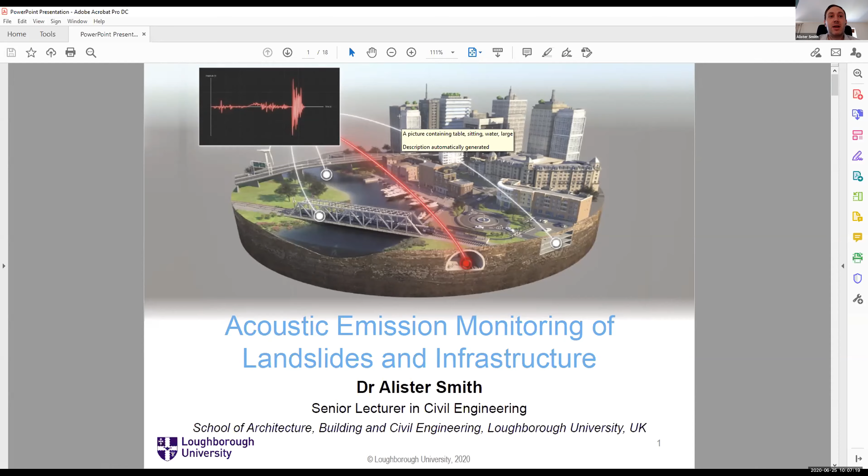My name is Alister. I'm an academic at Loughborough University in the School of Architecture, Building and Civil Engineering, and my background is in civil engineering. In this talk, I'm going to go through some research we've been doing over a number of years to develop an early warning system for landslides that's based on acoustic emission monitoring, how we've commercialized this system, and the ongoing research that we're doing since the commercialization took place. So first, I'm going to talk about landslides and why they're a problem. I'll then take you through the early warning system that we developed and how we commercialized it.

So this is a brief overview of my journey with this research. I started with my PhD in 2012 on a project called Slope Alarms, and the aim was to develop an early warning system for landslides that uses acoustic emission, and I'll explain what acoustic emission is in a moment. And then my postdoc research from 2015 to 2017 focused on redesigning the landslide early warning system for low-cost manufacture.

And the aim was to develop a system that could be used by vulnerable communities in low and middle-income countries, because these are the places where lots of people are killed from landslides. And early warning systems would be able to reduce these fatalities, but they're currently too expensive. And then it was in 2017 when we commercialized the landslide early warning systems. And since then, alongside the commercialization, I've been working on developing new acoustic emission technologies for new applications, such as for buried pipelines, for pile foundations, for dams and retaining structures.

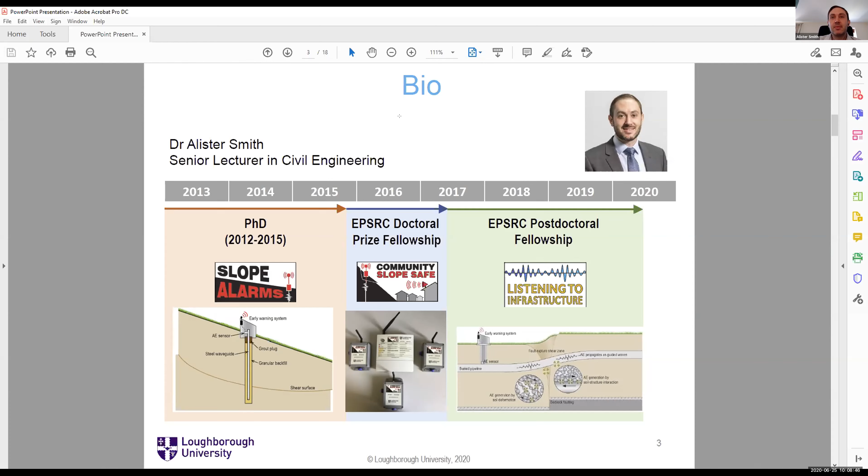So landslides kill thousands of people each year. Each black dot on this map shows the location of a landslide that resulted in fatalities between 2004 and 2010. And there were 32,000 fatalities from landslides in this period. And this is focusing specifically on landslides that didn't result from earthquakes, because they result in lots of fatalities, but the mechanisms of the landslide are very different.

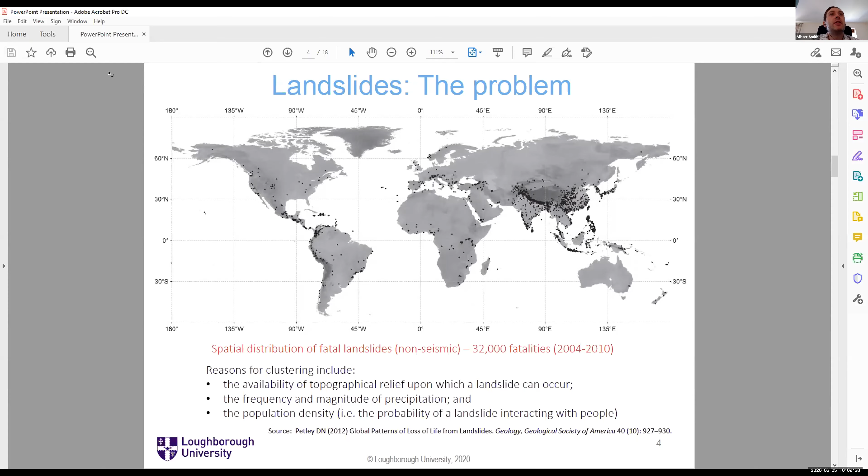So acoustic emission is essentially high frequency noise, and all materials generate acoustic emission when they are stressed or they deform. And the ground is made up of lots of small particles called soil. And when deformation takes place, these particles interact and they release high frequency noise. And our research aims to listen to this high frequency noise to develop an understanding of what's happening inside the ground. So the idea is that if we're listening to high frequency noise that's increasing in frequency and magnitude, then this would indicate some failure processes taking place.

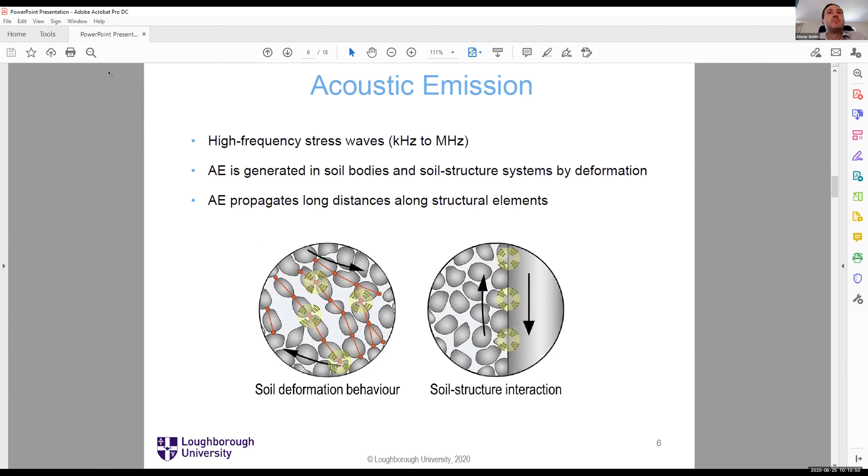This is the system that we developed for slopes. So it uses what's called an active waveguide. So you'll see here, this is a cross-section illustration of a slope, and we drill a hole that intersects any potential or existing shear surface in the slope, and a shear surface forms when a landslide takes place. And inside the hole, we install a steel tube, which is the waveguide, and around the steel tube, we backfill with granular material. At the top of the instrumentation, there's all the electronics, so the processing unit and the early warning system, which is protected by a surface cover.

Now, when the slope or the landslide moves, it causes the backfill around the steel tube to deform, and this generates high frequency noise, which propagates up the steel tube to the sensor at the ground surface. So that's how the system operates.

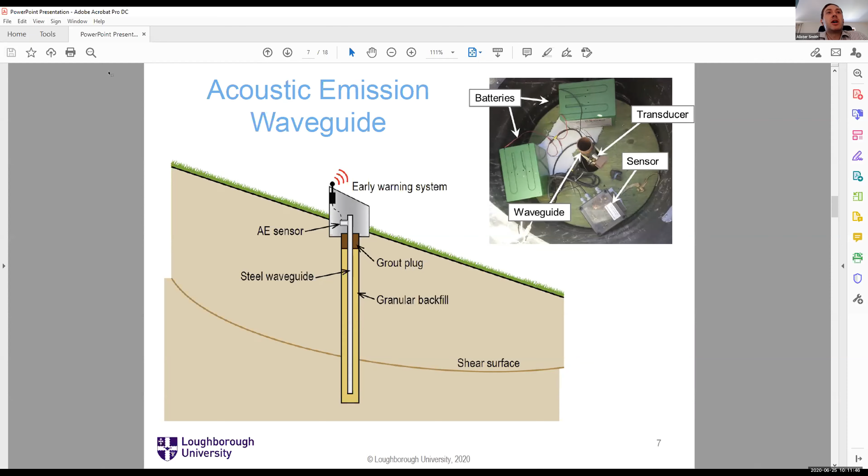In terms of the early warning system, we've just talked about the active waveguide, and that's the part of the system that generates the acoustic emission, the high frequency noise. And that propagates up the steel tube to a sensor. A transducer is a type of sensor at the ground surface. And the sensor converts the mechanical vibrations to an electrical signal, which are then processed by the Slope ALARMS sensor node. And it does this continuously and in real time, and it's counting the energy that's released in the acoustic emission. And we set a series of trigger thresholds.

And when these trigger thresholds are exceeded, the system communicates this with a communication node via a wireless network, which then sends text messages to responsible persons to take relevant action, which could be to evacuate, or it could be to stop traffic entering part of a rail network or a road, for example.

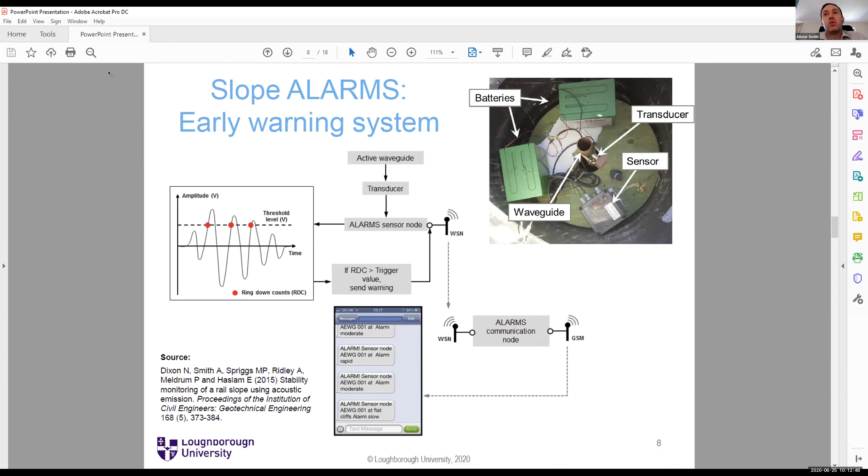Community Slope SAFE is a low-cost version of the system, and the principle is that we reduced the functionality. So this system doesn't send text messages. Instead, it has an audible and visual alarm, and the base station is located with a responsible person within a vulnerable community. And when the alarm is triggered, the siren goes off, the flashing light goes off. The idea is that they then implement the emergency procedure.

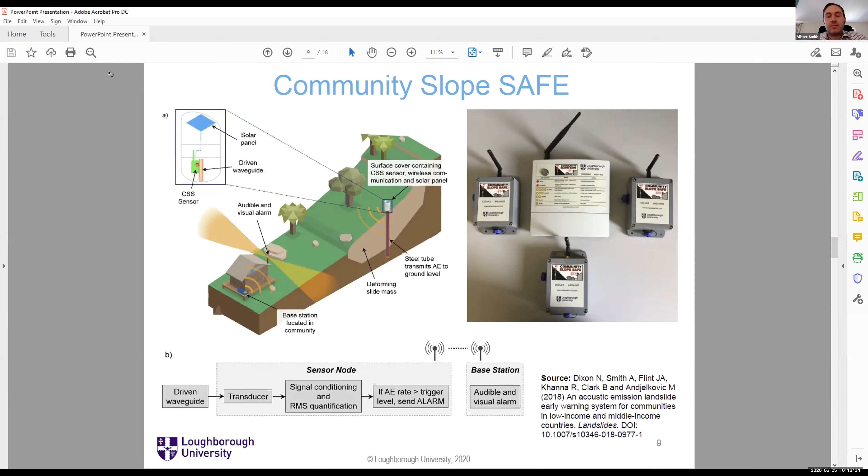A lot of the work that we've been doing over the last 5 to 10 years on the project has been developing proof of concept and progressing the research through what's called technology readiness levels. So when you develop an idea and you start to formulate the concepts, the technology readiness levels that you would be operating at are TRL 1 and 2. But then when you start to demonstrate how it works in the lab, and then in the real field environment, you progress through TRL levels. And this process is a really important part of commercialization.

So we developed the process and demonstrated it in the lab, and then we embarked on lots of field trials around the world. So that resulted in 28 sensors being installed on 15 different slopes in 6 different countries. So we have a big evidence base of the performance of the system, which was really valuable when we were talking to commercial partners and demonstrating that the system works.

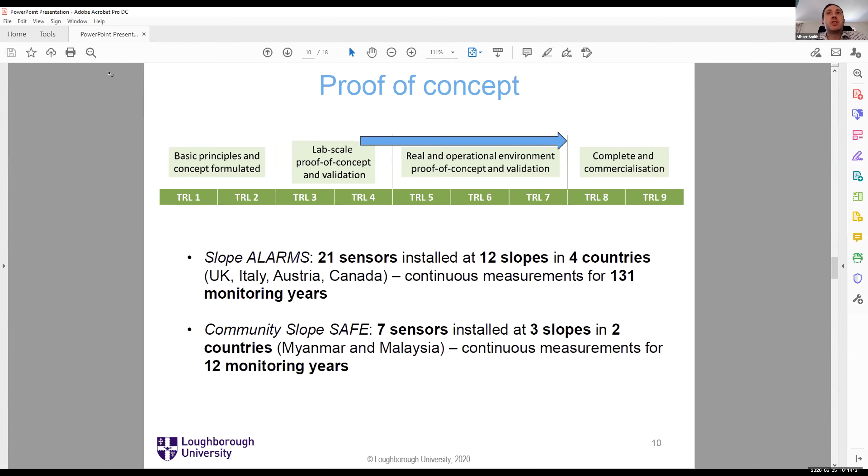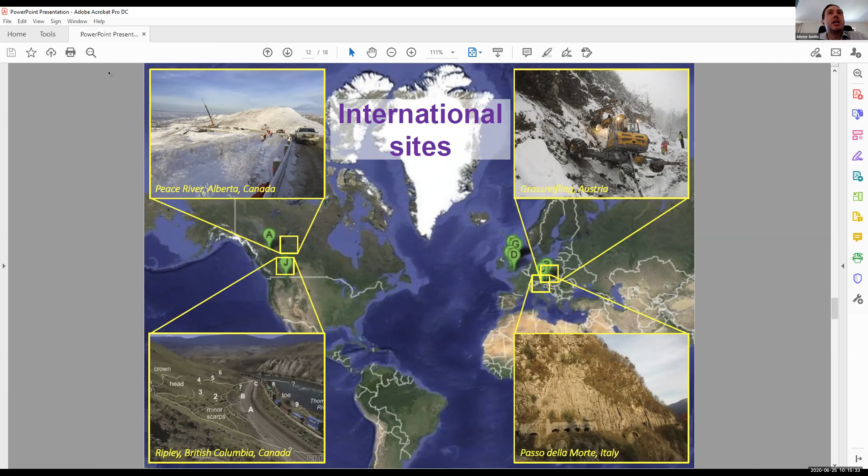These are some of our international sites. So we have 2 sites in Canada, one with Alberta Transportation, which is a landslide impacting on a highway. And then we have a site with both Canadian railway companies in British Columbia. We have a site in Austria with the Austrian Railway, and a site in Italy, in the Eastern Italian Alps, with the Italian Research Council. And we have 2 trials of the community slope safe system, one in Malaysia and one in Myanmar.

So we were looking for a commercial partner, and we started to speak with RST Instruments, who are a worldwide distributor and manufacturer of geotechnical instrumentation, and they're based in Vancouver. In 2017, we went to the head office and we pitched the idea to them and demonstrated all of the evidence that we have. And then we embarked on negotiations for the licensing agreement, which took several months.

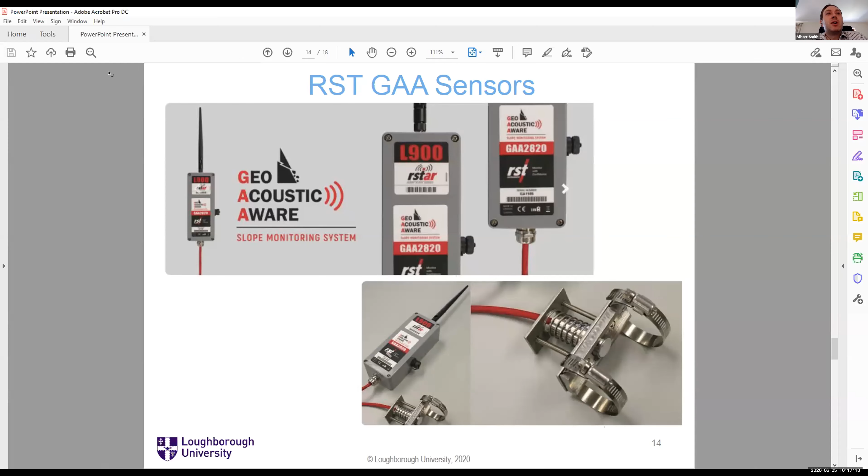And then after we agreed the license, RST developed their own version of our slope alarms and community slope safe systems. And they've called it the Geoacoustic Aware, the GAA, and that's what you can see on the screen now. This is available, it's being distributed around the world, it's on sale, so if you want one, you can go and buy one.

So just to provide an overview of the journey, slope alarms and community slope safe are the research sensors that we've developed for landslide early warning to demonstrate the concept. And these have been commercialized by RST Instruments, and they've developed their own versions of the sensor, which are on sale now.

Alongside the commercialization of the landslide early warning system, we're now developing acoustic emission technologies for new applications, such as to detect deterioration or failure processes in buried pipes, pile foundations, retaining structures, dams, etc. And I just wanted to show you an example illustration of how the listening to infrastructure concept works.

So here there's a buried pipeline which is being impacted on by differential ground movement. The differential ground movement is causing the soil around the pipe to move and deform, which generates the high frequency noise, the acoustic emission, which propagates along the steel tube as guided waves. And then we listen to this with distributed sensors. We can locate where the sound is coming from, and we can provide an early warning for decision makers to take action.

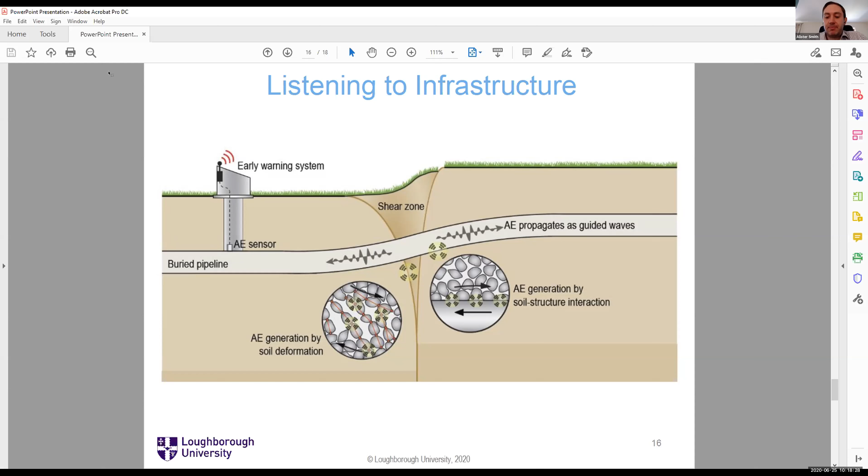Thank you very much, Dr. Alistair, for your excellent presentation. Let's move to our second speaker, Dr. Avi. Hello, hello. Hello. Yeah. Are you ready? Are you happy to continue? Yeah, I can present, if that's okay. Yes. Hello.

So everyone, I'm Avi. I'm the co-founder of Previsico. We're a flood forecasting company that spun out of Loughborough University in January 2019 to reduce the cost of flooding globally. I did my PhD at Loughborough University, supervised by Professor Yu, who is an expert in hydraulic modeling. And he developed his own software for modeling flooding over 20 years ago. And over the years, he's been publishing it widely.

But since 2016, he's been working on a flood forecasting system in partnership with the UK government, who realized that there's a big gap in the existing warnings that are available to members of the public. And that project kind of snowballed into a very large one where we were really working hand in hand with the government. And we realized that to really operationalize the system and to provide warnings to a far wider market than just government, we needed to form a spin-out company.

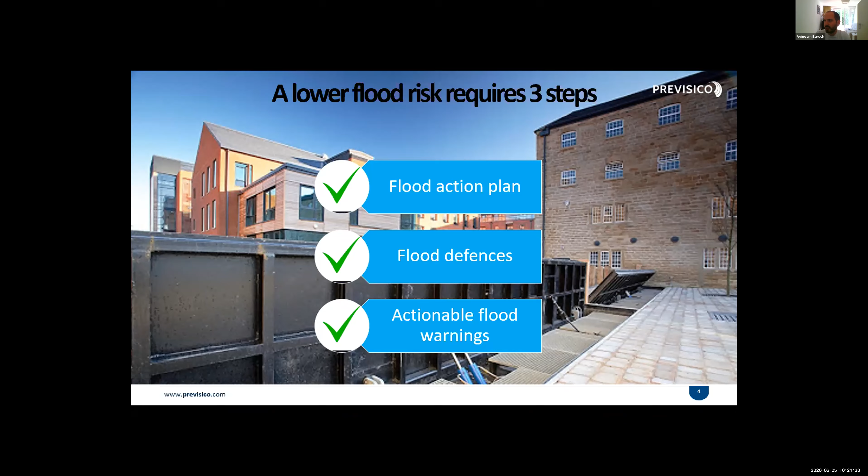You need a flood action plan, so you know what you need to do when the flood hits. You need to have some sort of flood defenses if possible, and you need to have an actionable warning. And when you have an actionable warning, they have very big returns on investment. So with the EU early warning system for river flooding, for every €1 they invested in the scheme, they returned 400 back.

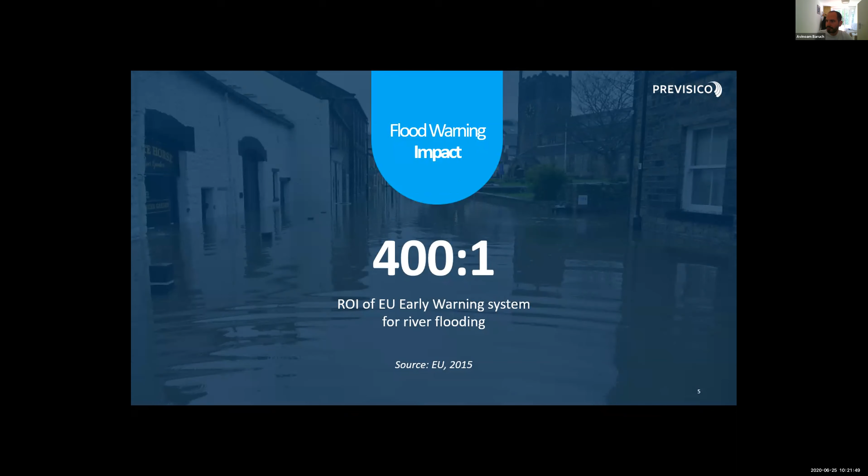But the problem with them is they're only available for large river systems and the sea, so that's 2.4 million properties. They're not available for small river systems, and they're not available for surface water flooding, which is the biggest flood risk in the UK, but also globally. And I think people often overlook surface water flooding because it just comes and goes very quickly, and it's rarely on the news.

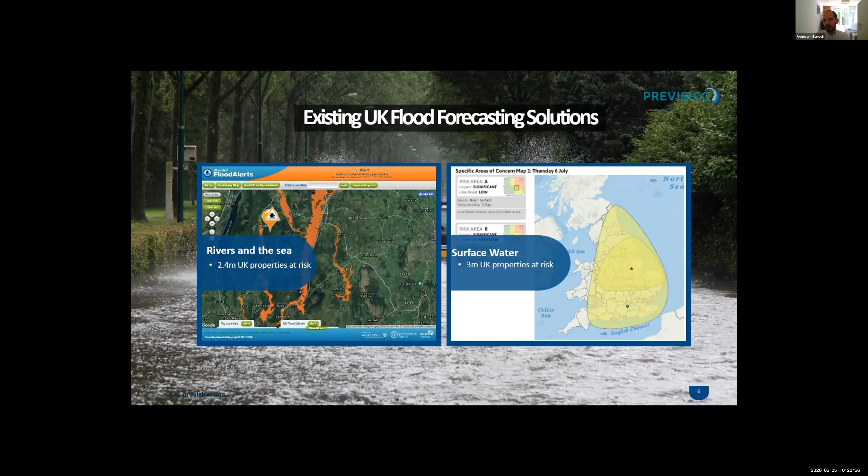So with Professor Yu's flood modeling software, we developed a technique to remodel flooding every 3 hours, and we formed a partnership with IBM's weather company, where we take their rainfall forecasts and predict what the flood will look like for the next 2 days every 3 hours. So what we ended up producing was a depth, extent, and a time that the flood would hit, and we produced it right at the property level.

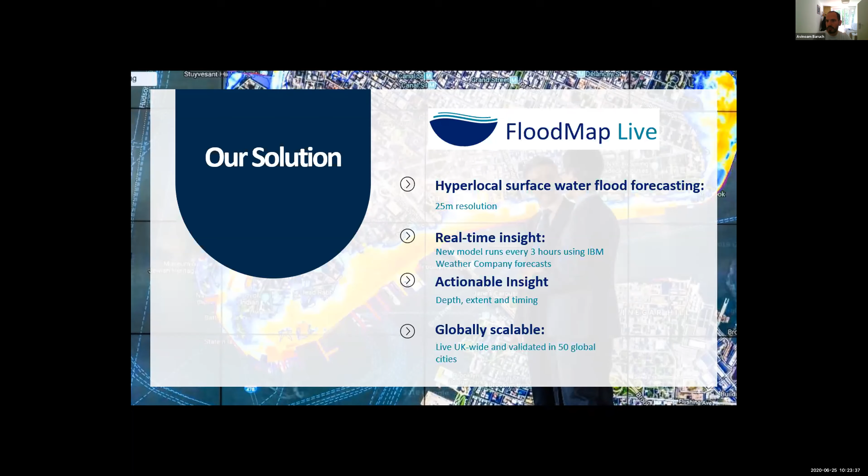And we've now scaled up to UK-wide, but we've also got pilots across the globe in the US, in Japan, in Australia. Our visualization platform went live in November. The UK was hit by flooding in November, and we were live for that event. So here's a little visualization of what our warnings look like.

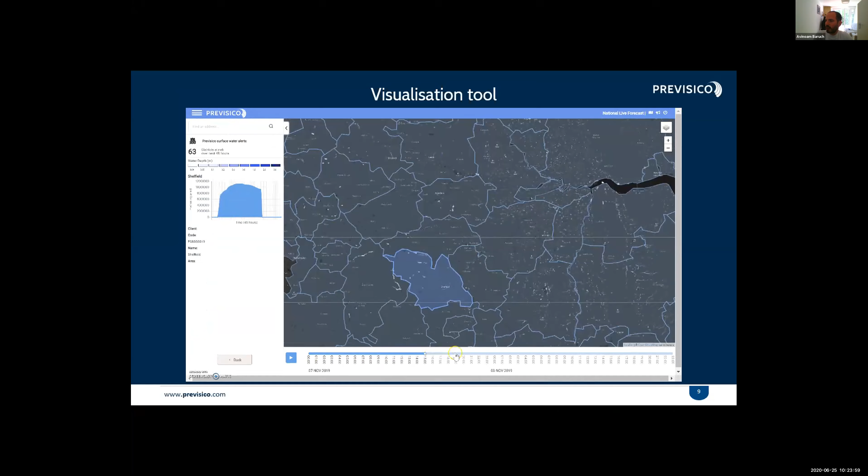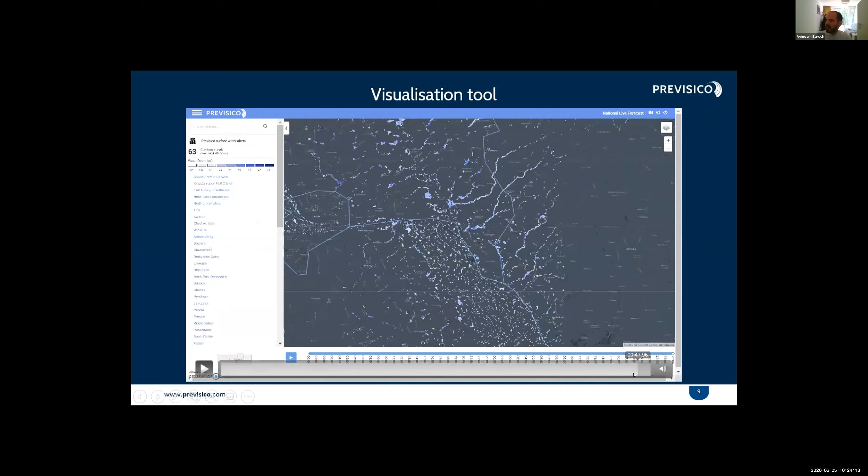So we provided an hour-by-hour prediction showing right down to the street level which areas would be hit and which districts would be worst affected. And you can really zoom in and see right down at the street level. So maybe I'll fast forward through this video. You can see individual properties, when the flood will hit, how deep it will be, and which surrounding roads will be affected.

And as I said earlier, there's a lot of data that goes into it, from the land cover, geology, elevation, and we're in partnership with IBM for the rainfall. So it can be set up anywhere across the globe. All we need is to access the data, to then model, inspect its performance, and calibrate it.

And then, in partnership with Leicester University, we've developed a satellite image detection algorithm that detects flooding from satellites, which combines with our forecast to then be able to show what actually was hit by flooding.

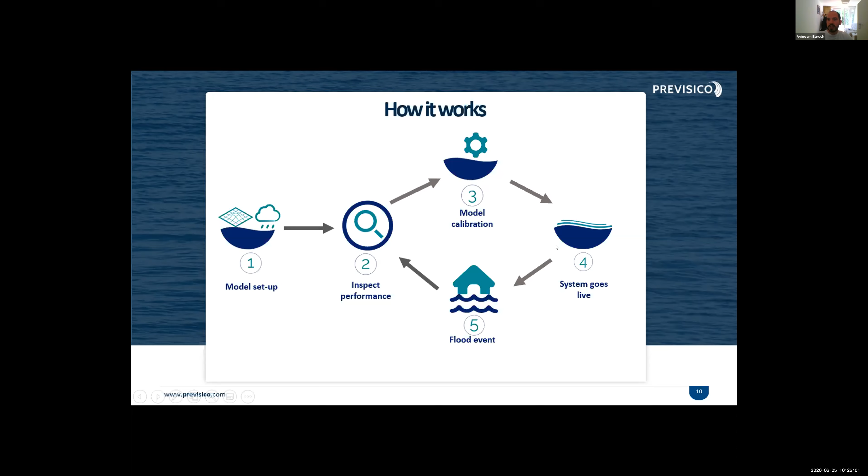And again, the Cabinet Office in the UK, so that's the central government, they launched the platform in partnership with Loughborough University and Previsico last week, where they have 4 cities, so London, Manchester, Birmingham, and Leicester, all trialing the service. But for our core customers, they can get it across the whole of the UK. And the Cabinet Office, again, they use it really to coordinate their emergency response, so to send police, fire and rescue to the right locations before the event hits. And they've been using it for that purpose.

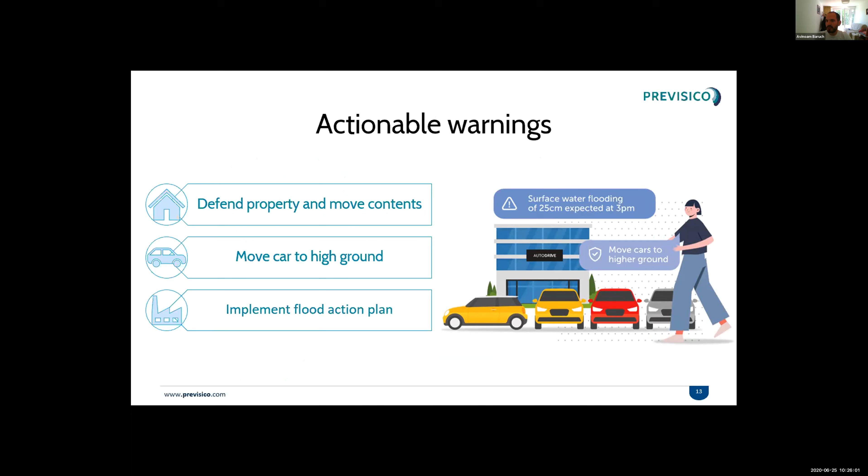But as a company, we're not just targeting government, we're also working a lot with insurance companies. And where we're really working with insurance companies is helping them better support their customers. So for example, telling them that you're going to be hit by flooding at 3 p.m. today, and it will be about 25 centimeters. Maybe move your cars to high ground, maybe set up some defenses for your property. It can also, for the claims and operations teams, send people to the right locations to really reduce the losses, which is where we then also help. And we also then have a data feed that people can use for all sorts of different purposes.

And really where we want to be heading is we want flood insurance to be lower, and it should be lower if people are better at managing their risks and reducing the sort of losses that can occur. Then the insurance can be reduced, and it can be a far better relationship. So that's really as a company where we're heading.

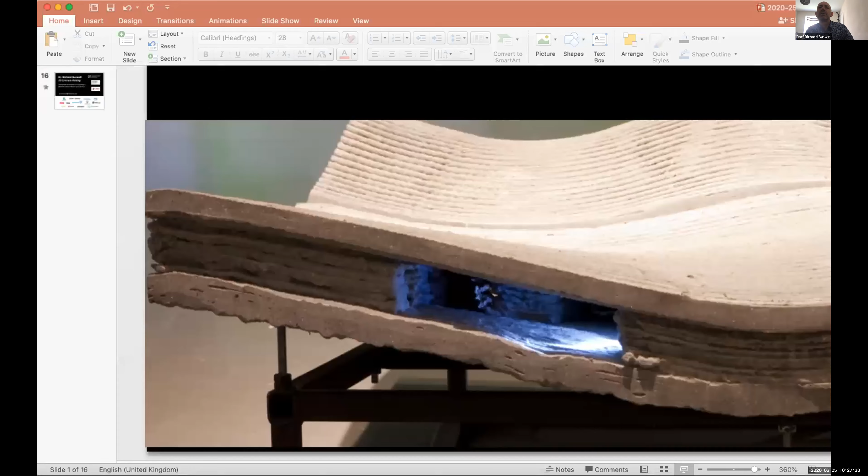Professor Richard. Hello. Yeah, happy to continue. Over to you. Okay. Let me just get to grips with the technology. I think that's on there. Okay, can everybody see that? You can see. Excellent. Yeah. Thank you very much.

Okay. Thank you very much for the opportunity to share this bit of research with you today. I've been involved for the past 15 years or so in developing a technology called 3D concrete printing, which you may have heard about, and there's been lots of media, lots of interest in recent years in the space. So I'll give you a little bit of an overview of background, the sort of work we did, and the sort of research challenges that we're currently exploring.

So the construction industry worldwide has different issues in different regions, but generally we have a lot of common problems. Quality and project overrun issues are a constant issue, particularly in the UK. Hazardous working environments, we want to take people away from harmful environments. Key shortages in skilled labour are also a problem. And in places like the UK, we're looking towards large investment in infrastructure and to constantly improve the built environment. So with these problems also comes the pressures of improving our built environment.

As part of this, we know that automation is going to be key. We have to increase productivity, improve quality, but at the same time reduce the cost of delivery. And automation has been demonstrated in manufacturing to be a way of doing that. And there's a lot of interest, both with applying automation to on-site operations, but also in particular making most use of off-site manufacturing. So this is where we're building sections of buildings or volumetric chunks of buildings in the factory under tightly controlled conditions, where we can generate better quality and have more production control, produce things at the right time so that when they arrive on site, it's much quicker to install and reduces the site time.

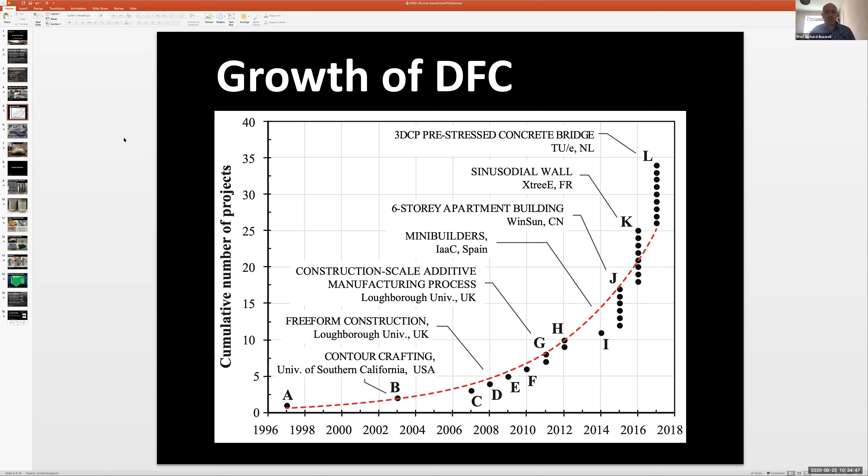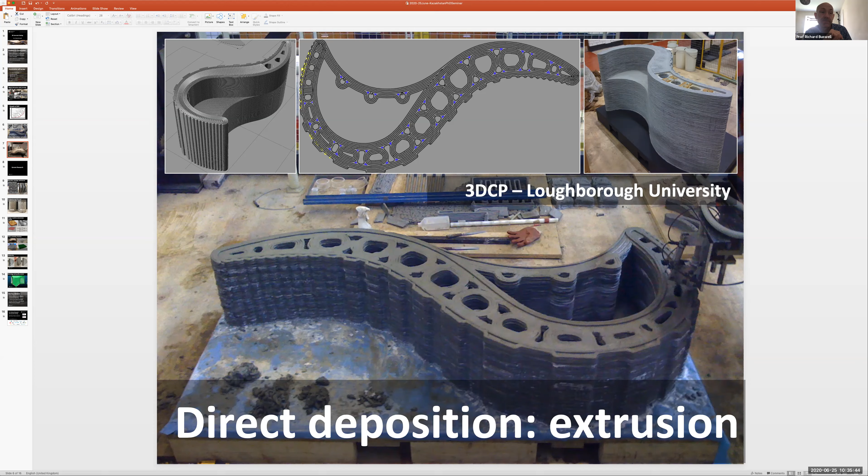It's very much the same as additive manufacturing, but just on a larger scale with concrete. This was the first component that we printed, and it was a world's first additively manufactured 3D concrete printed component. It was also the first to be manufactured with reinforcement. We then looked at different products and where we might be able to deploy the technology. And panels is an interesting one because it is expensive to manufacture with molds.

So the thing with additive manufacturing is you're trying to create a freedom of geometry and component without requiring a mold, because the mold is quite expensive, and the more complicated the geometry, the more expensive the mold gets. So if you're able to employ these processes to give you more freedom of design, freedom of form, then you can add value by having bespoke or very low volume manufactured components. And in actual fact, in construction, what we've done over the years is to try to modularize that, like the brick in a wall, for example.

It's a repeatable, same size component, but to yield more benefits, to get more perhaps environmentally responsive buildings, and to give a more architectural signature to buildings, having freedom of shape and form is of value. So we focused on generating these panels. These were the world's first doubly curved panels. They're conformally printed. They're also hollow. So these were concept parts that were sort of demonstrating the flexibility that could be afforded by the process.

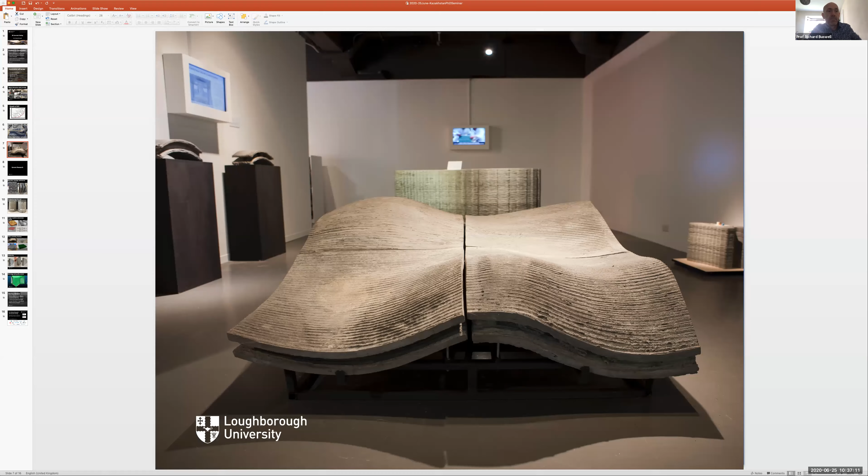This was all completed. Those projects were done about 10 years ago. And so on to more current research. We're still very much active in the field. We have 2 research projects at the moment.

And we are interested in things like the materials. So we extrude the concrete material. We have to understand the rheology. We ask it to do a lot. It has to be thin and pumpable to come out of the nozzle, but then it has to stay in place. So this has its challenges because cements and aggregates are manufactured and natural ingredients, and this affects the rheology

quite a lot. So understanding the control, the admixtures, the way we can test is still very much a research question, but one that is absolutely key to understanding in order to get these processes commercial and in order to have them being as effective as they can and as cost effective as they can.

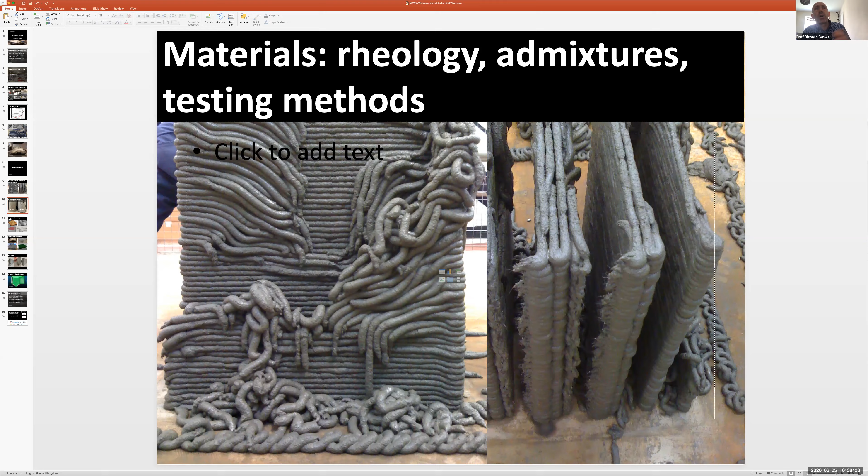The hardened properties are also critical. We're building concrete components, and at the moment the technology is such that we can manufacture quite safely things like benches and seats, which are large volumes of material. We have freedom of form, so we can design them in very cool and sexy sort of ways, but they sort of sit in compression. There's no real structural load on those components, which makes them a very good first market product.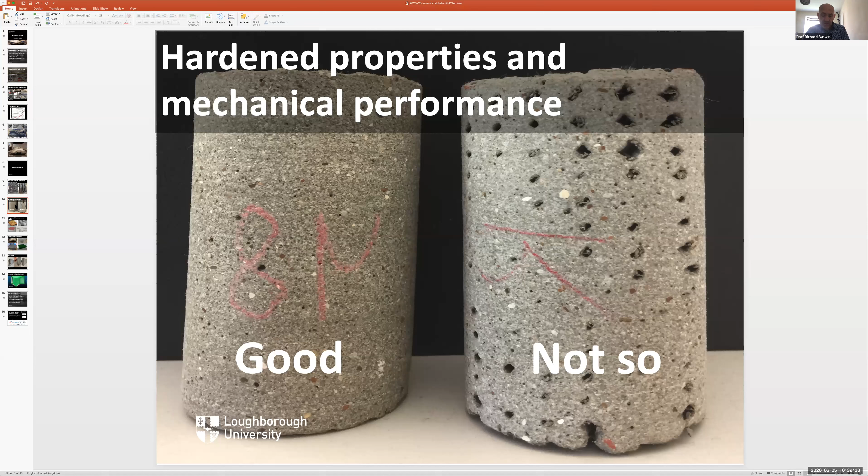However, if we want to do more exciting things, structural things, cladding panels, then we have to understand far more about the mechanical properties of the materials such that we can actually do structural design, which is not only the matrix material, but incorporating reinforcement. And so we are undertaking work on characterizing reinforced concrete materials right at this moment.

Additive manufacturing means that we are able to have freedom of design, but of course we don't have complete freedom of design. We're still stuck with gravity as we're trying to build components up. The material rheology has limitations. We can't build in thin air. So there are certain constraints that go hand in hand with manufacturing these products. So the design of the parts has a large part to play in a successful part.

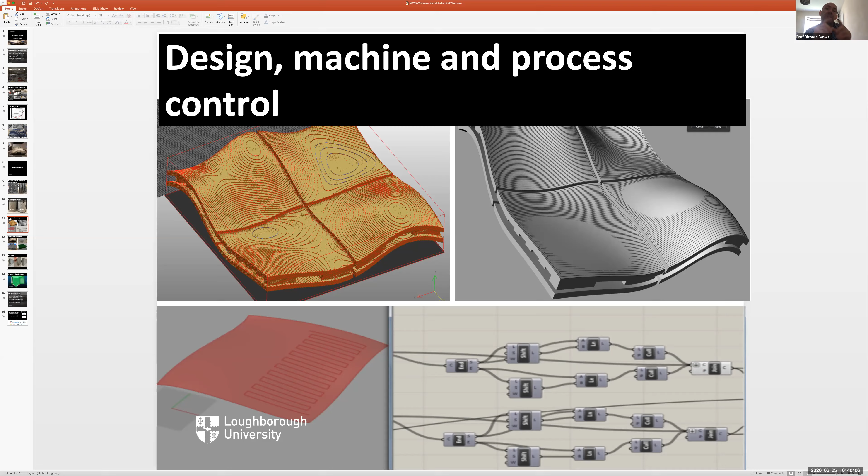And so understanding the design and how we translate that into process control is also a very hot topic. And again, there are new companies now finding niches where they're developing software specifically to service this new market.

Finish, assembly and function. So what do we use the parts for? Can we actually add value to the part, not only in an aesthetic sense, but by having more functions in there? And one of those we tried at Loughborough was perhaps an acoustic panel to do some sound absorption, maybe using a Helmholtz approach, but also recognizing that these parts are largely going to be assemblies.

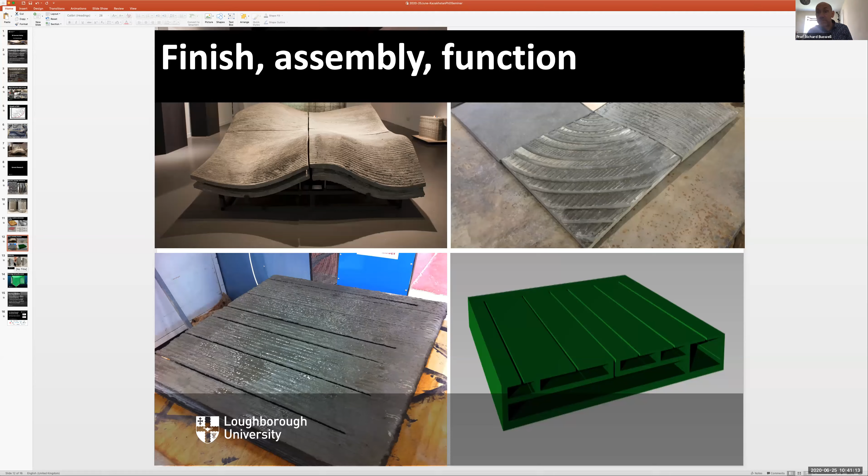And so if they're going to be assemblies as they are in buildings, you know, we make buildings, we don't make them out of monolithic panels. They're usually sections of panels that are fitted together in a certain way. That fits very much with an off-site manufacturing approach, but we have to understand how we can make these panels to be assembled together, how they can fit together, etc. So all of these are helping to inform the design and the production and post-production assembly of components, which is also interesting.

In order to assemble parts and to have them be aesthetically as good as they can be, we have to understand the conformity. So how accurately can we actually print the materials? And again, a lot of the products that are out there at the moment, like benches and planters, the actual tolerances of those manufacturers are not that critical, and they're sort of exotic parts that have a certain kudos on their own. But if we want to move that again into components that fit into construction, we have to be able to assemble to far tighter tolerances.

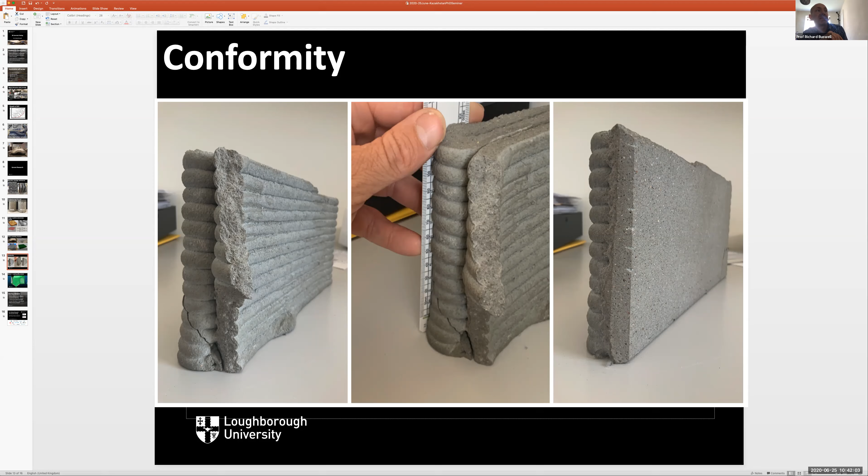And so we're quite interested in how we can enhance current 3D printing methods to produce those sorts of tolerances in our manufactured parts in an automated way. As part of that, we also have to adopt new ways of measuring components, and we're looking to the manufacturing sector to look at how we can interrogate manufactured components to learn more about process capabilities and how they fit in.

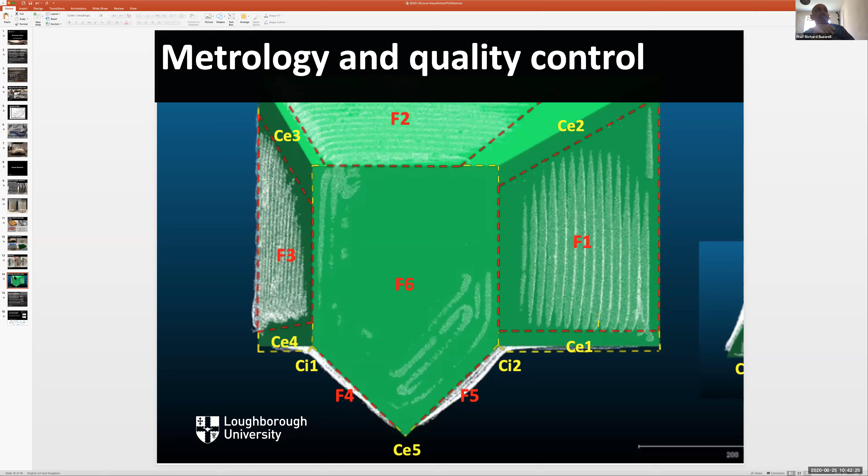So I guess just to sort of wrap up, we've set up a startup initiative. So we've done some research. We invented the technology some years ago. We are undertaking current research with industrial partners now to improve the technology, but we've also set up a startup initiative to try to bring the technology into the sector.

And that startup is embedded in a precast organization where we can learn how to industrialize the process to deliver cost-effective parts. We want to be able to deliver greater design freedom in objects. We want to increase the productivity of a manufacturing environment. We want to make that environment safer for operatives. And we want to generate greater flexibility in manufacture.

So this is not only in the shape of the part, but in actual scheduling the production to move us towards a time when we are far more confident about how long it will take a component to be made and hence shipped. And the other exciting thing about using robotics to enable the 3D concrete printing is that we're able to build very flexible manufacturing cells that can produce a range of components. So we're able to shrink traditional factory footprints to a much smaller area, which is also commercially an advantage.

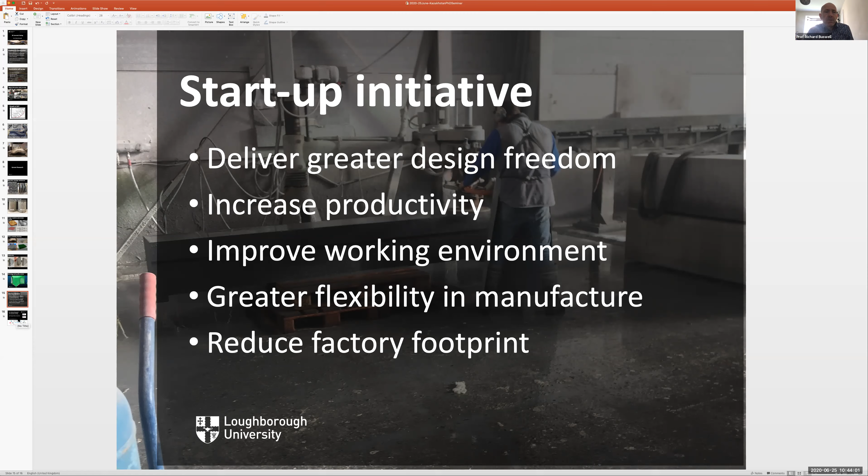So what I'd like to wrap up with is just to say that the whole digital fabrication area, and particularly 3D concrete printing, is a very live area. It's very exciting. It's one of the few times, and probably the only time in my career, where we've had cutting edge research literally running in parallel with cutting edge commercialization initiatives. You can find these all over the world.

If anybody's really interested in finding out more, then please Google Digital Concrete 2020, which is an online conference run out of Eindhoven. It starts, I think, in the first week of July. It's an afternoon run session, so it's quite reasonable, but there you will have all of the latest cutting edge research in this field. And it will be a really interesting conference for those of you with a particular interest.